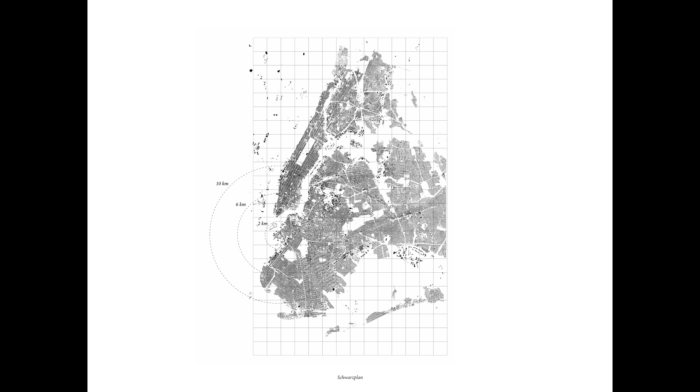Red Hook is one of the earliest neighborhoods in New York City, located on a peninsula in the southwest tip of Brooklyn. It has a long history related to the working waterfront as a part of the New York City harbor. In the 1850s, the Atlantic Basin was opened for the first time and Red Hook became one of the busiest and most important ports in the country.

In 1939, Robert Moses, also known as the Master Builder, started the project of Gowanus Expressway as a part of Interstate 278 communication. It created this boundary separating Red Hook from the Carroll Gardens and the rest of Brooklyn. People are sometimes also referring to Gowanus Expressway as the Chinese Wall.

Its separation, caused by the cutting infrastructure of Gowanus Expressway and poor interconnection with the New York public transport system, creates this certain disconnection, which makes Red Hook so special and diverse in comparison with any other part of Brooklyn. Back in November 2017, this was the first couple of words I wrote down about my observations. They served me as a backbone throughout the whole process of my master dissertation.

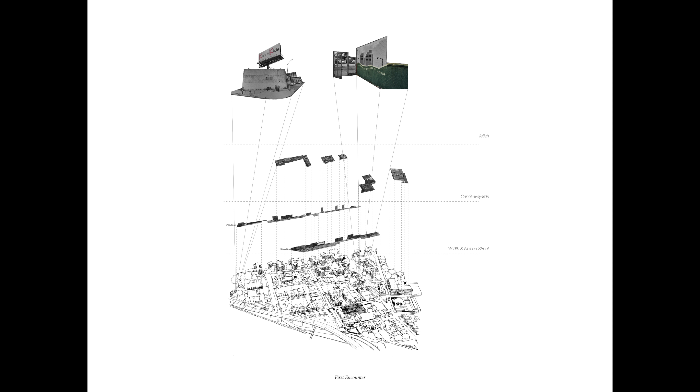Streetscape of Red Hook radiates with potential, mysterious no man's lands filled with old car wrecks and silently asking for a new purpose to ignite the new life and serve the surrounding inhabitants, a potential spark of life. The gradient of life and work in such a raw and genuine form is something I encountered in these streets. People move within the buildings and the streets like it's a natural continuation of building. It's not just a corridor, but another full-fledged room.

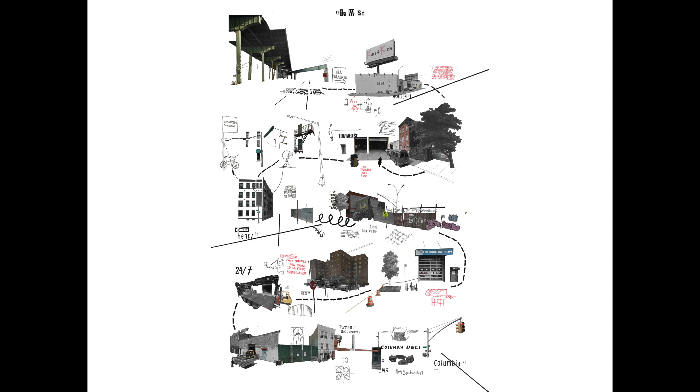Doors are left open because there's really no point in closing them during the day, since someone is constantly moving through, in and out. Streets merge into the buildings and vice versa. By the combination of the technique of collage and sketching, I retraced my journey through Nelson Street and West 9th Street, where my whole research started.

I focused on everything which formulates the architectural language of the streetscape and its characteristics. The process of creation of these maps exposes the very strong relation between the architecture and the added layer of appropriation. Each street has its unique appeal due to this layer added on top of the universal base of generic architecture, easily interchangeable with the immediate vicinity.

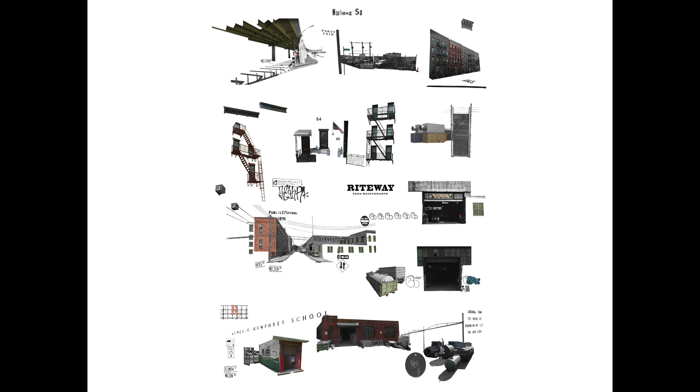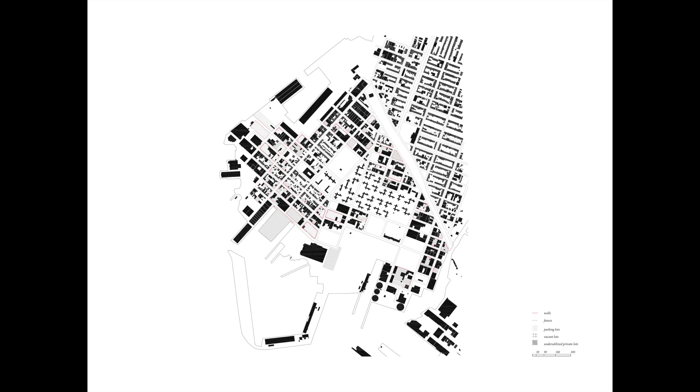To further investigate these relations of different vacant lots and their morphology and other characteristics, I created an adaptation of the Nolli map. It showed that the original urban grid is not completely relevant in the urban context of Red Hook, and if we start questioning the permeability of the empty lots, the whole concept of the grid is slowly evaporating. This puts a question to how we look at the movement within the urban fabric, especially slow mobility, in the current context, and what are the potential transformations and improvements for the future.

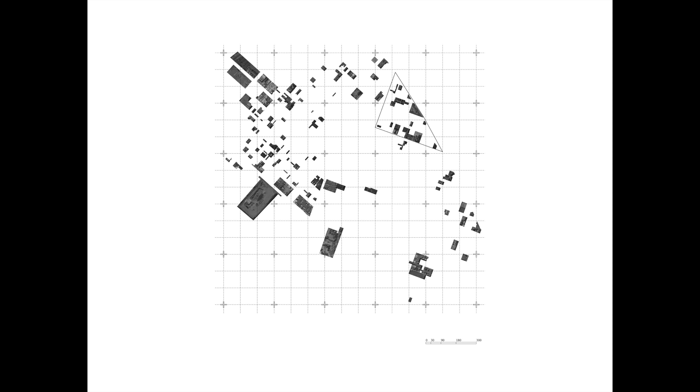From the observations and research, I came to design decisions which were crucial for my next process of creating the architectural intervention, considering the pivotal scale condition of the neighborhood. By allocating all of the underutilized and vacant lots within the urban blocks of Red Hook, their ubiquity within the area came to understanding. The walls determining the blocks of Red Hook give a very porous and ambiguous feel. The matrix of the newly discovered geography offers new models of spatial syntax and slow mobility connections, contradicting the urban grid as a given condition primarily designed at the scale and pace of a moving car.

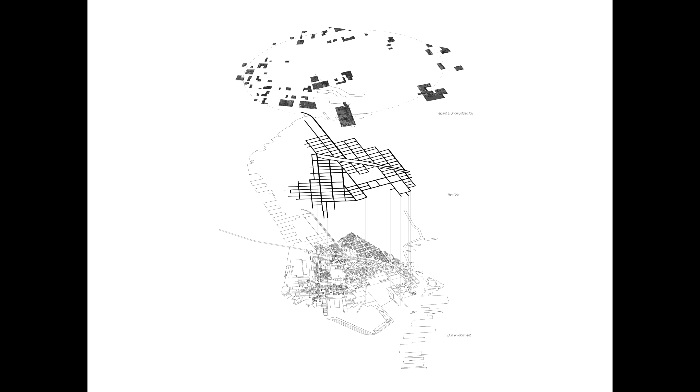The goal of this intervention is to allow a completely new way of movement in the urban environment of Red Hook and reconnect the identities of each urban block to the public realm and streetscape on different levels, focusing on vacant lots and their reconnection with the building units and the streets forming the new pedestrian infrastructure. This intervention is becoming part of the pre-existing conditions and creating bonds between the voluntarily shared spaces. I came to the conclusion that a unifying urban strategy for the whole neighborhood of Red Hook is too generalizing and would suppress its richness and variability.

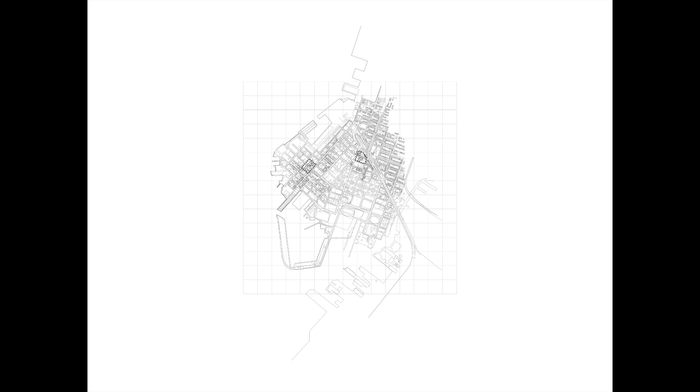Therefore, I'm proposing a series of modest intervention sequences which can be easily set up in the different morphologies of each of the urban blocks, using similar principles, by respecting and enhancing all the potentials, different actors, and site specifics. To allow myself to demonstrate this approach and to be fully capable to depict and describe all of the aspects of my design in this defined environment, I decided to focus my design process on two strategic sequences of the urban blocks.

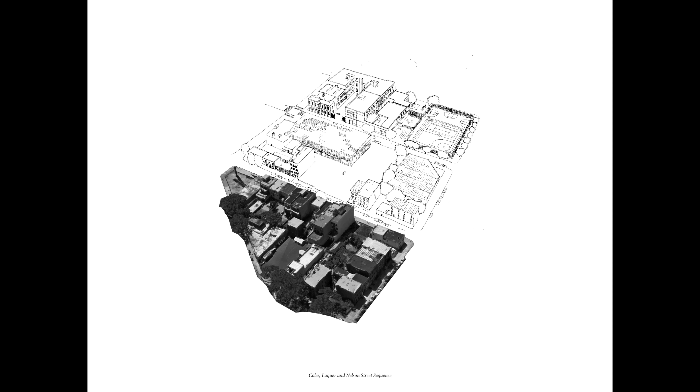The two blocks at the northern edge of Red Hook, represented by the Gowanus Expressway, are forming a rich mixture of different functions and actors. It is one of the few places from where you can actually enter the whole neighborhood and get its first impression. By opening the vacant lots, which have not been in use for more than 20 years, in combination with introducing a new system of vertical and horizontal infrastructures, the whole spatial syntax of this area can be reconfigured.

Two main spinal passages are cutting through the blocks and allowing new ways of access for the inhabitants. In the first one, between Coles and Luquer Street, I proposed the new possible connections, opening up the access to the back gardens of the dwellers on the ground level, in combination with vertical and horizontal connections of the inner facade with the existing fire escape staircases. Also, by an addition of a safety ladder on the column, the old billboard, which is not in use anymore, can turn into an observation deck of the whole neighborhood.

The big part of the second block is occupied by tank maintenance industry, which appropriates a big part of the adjacent lot nowadays. The added cross-shaped footbridge structure reorganizes these vacancies between 4 different actors and gives each one of them the possibility to appropriate and interact with the space depending on their current needs and program.

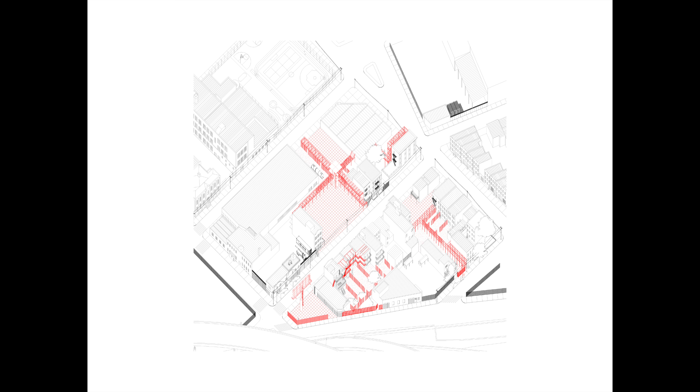The second sequence I decided to demonstrate my intervention on is in these newly rediscovered geographies of the vacant lots, very similar to the previous one, but also very different, as all the urban blocks of this neighborhood have their unique character. The variety would even suffice for a small settlement, so it gives this block a feel of an independent unit. There's a small shop, pharmacy, a church, high school, small workshops, dwellings, and many more.

In this case, I also introduce a main spinal walkway cutting through the block within the vacant lots and reconnecting all the inhabitants, allowing them to climb down onto these lots and use them initially to navigate through and secondarily to appropriate them based on their own needs. It is all based on voluntary engagement and teamwork. In the first block, the intention is to get rid of the redundant fences and substitute some of those with more permeable ones, which I describe more thoroughly in the next 2 chapters.

The big building next to Conover Street serves as a social housing unit nowadays. By addition of the vertical communication and transformation of a couple of windows to doors, the roof is made accessible and a new entrance is introduced, allowing to go straight down to the inner green retreat of the block with flower beds and tall trees. In the second block, the opening of the adjacent cluster of the South Brooklyn Community High School can serve not only its students and teachers, but also the inhabitants of the rest of the block.

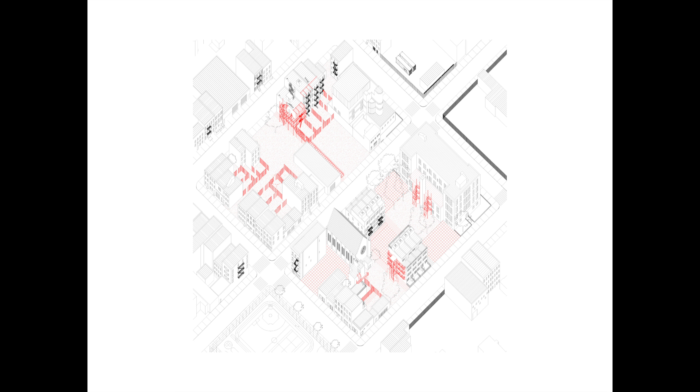The next scope of my intervention is the domestic scale. By zooming into partial elements of my intervention, I am going deeper into detail of all the relationships within the blocks. As a response to that, I propose new territorial bridges, creating a new string of pathways. Zooming in allows me to investigate all the adjacent neighbors and buildings. The next 4 drawings are accompanied by a couple of stories I thought of while making them.

Tonight I finally climbed on top of that black old billboard. It was so calm, with all the stress rushing behind my back, people in their metal coffins going nowhere at 60 miles per hour. I just sat there, maybe for like an hour, just watching over the neighborhood, as an old guardian watching the shore from the lighthouse. When I closed my eyes, I could imagine the sound of passing cars being the waves breaking over the cliffs of Red Hook.

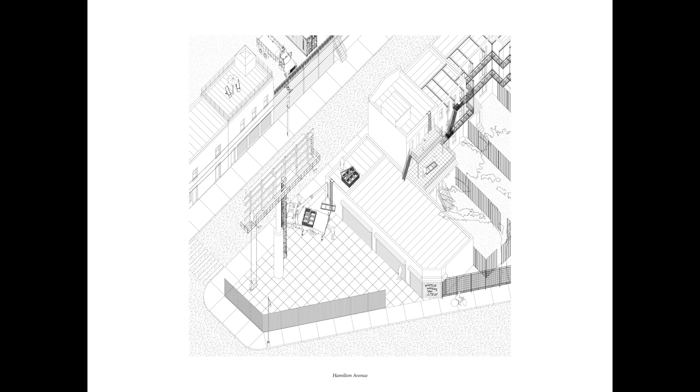It felt like everything just stopped for a moment, at least until I finished my last cigarette, climbed down and went back to my place.

Around a year ago, me and my friend just finished university and we had this idea to rent a place where we could work together, because it is really hard to work from home and stay focused. All the places we've checked, though, were pretty expensive and also quite far from Red Hook. Once we were having lunch at our favorite Defonte's sandwich shop, and we just started joking about how cool it would be to do it in this building that, apart from the ground floor of course, has been deserted for many years. Next thing I know, we were talking with the owner, who overheard us and got really excited about the whole idea.

6 months have passed since then, and they just finished the electricity at their new retreat. It couldn't have been done without the help of Nicolas Defonte, all the people who joined our fundraising and helped us to turn our dream into reality. I have a really good feeling about this. We meet up every day at work, new people come and go, and it's just around the corner from my place, and we have the best sandwich shop around right below us.

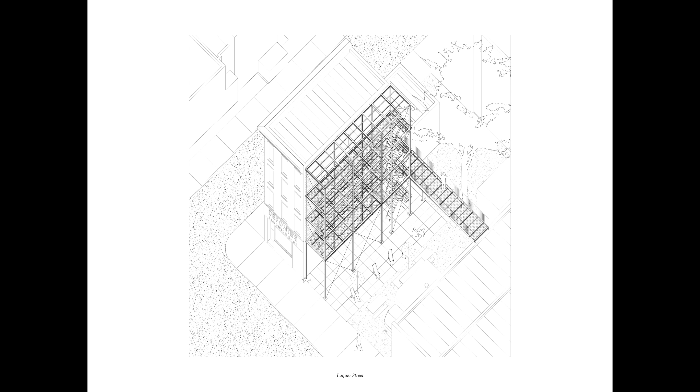Today, after our jiu-jitsu class, Grandmaster Robert had a cool surprise for us. After we were done with our session, he told us to go through the back of our gym to the garden. They had this brand new fence made out of a milky plastic, so you could kind of see through, and we saw some silhouettes behind in faint conversations. We slid the door open, and there was a big barbecue already going on. All of our parents, and also the people who lived around the neighborhood, joined. There were so many kinds of different food, and I couldn't even try all of them.

Master Robert told us that it's a special day because 5 years ago on this day they opened this branch in Red Hook, and also that Pat, who owns the place, talked to the people from church and they agreed that we can use the backyard to do some outdoor sessions and gatherings. Apparently they're also planning a summer school. I can't wait. I was looking at this lot behind the fence many times. It was always right next to our gym, but I've never been there until today.

I've never liked to do things by the book, but I'm glad they convinced me to do it the official way this time. Otherwise they could have given us a huge fine. So anyway, we just got the permit a week ago, and today we're doing our first public screening of the Red Hook Grid 2022 movie. I'm just on my way home with the Beamer to set it up on the structure that we built with the help of our neighbors and some local companies around 2 years ago.

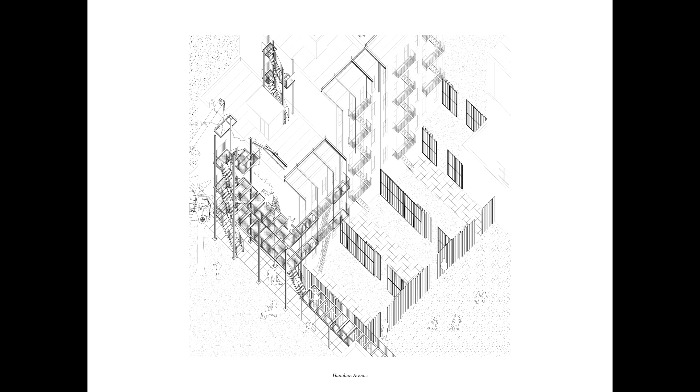The key part of my project lies in this interaction of people on the domestic level of my interventions. People that live in the houses supporting or standing in immediate adjacency of my proposal. Therefore, I'm offering different possibilities of filtering the porosity of the shared courtyards, private back gardens, and newly accessible empty lots.

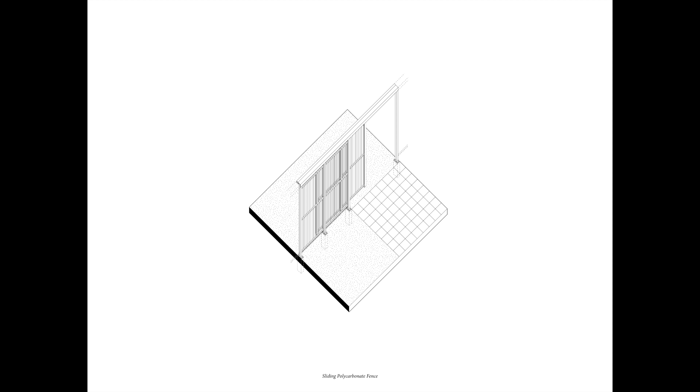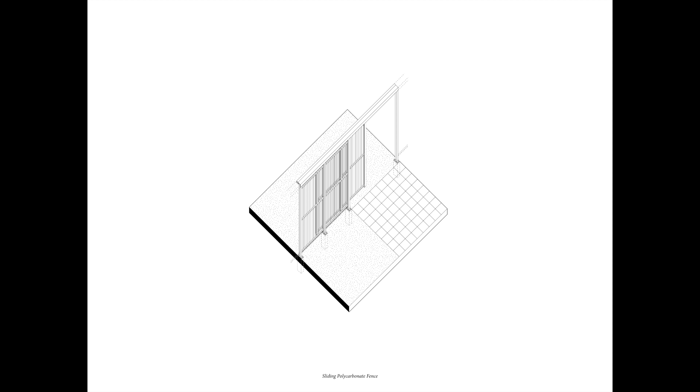Sliding polycarbonate fence. This simple system allows its users to control the accessibility of their gardens just by a simple push. Even if they close the doors, there still remains the notion of what is on the other side, because of the semi-transparent texture of the corrugated polycarbonate panels. They create this tension with the curtain-like effect between both sides. You can see silhouettes passing behind, yet it leaves you with a sense of privacy on one side or another.

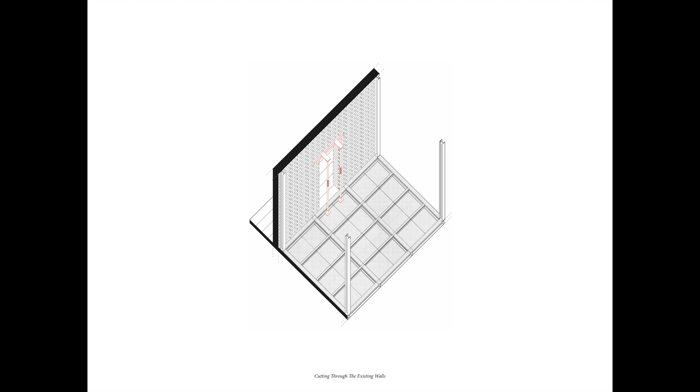The third dimension of vacant lots is represented by the blind walls of the neighboring houses. The intervention is allowing these blind walls to become a lively extension of the existing environment. By simply creating completely new doors or turning the existing window into a door, the spatial qualities of the house are altered without actually changing the inside of the building.

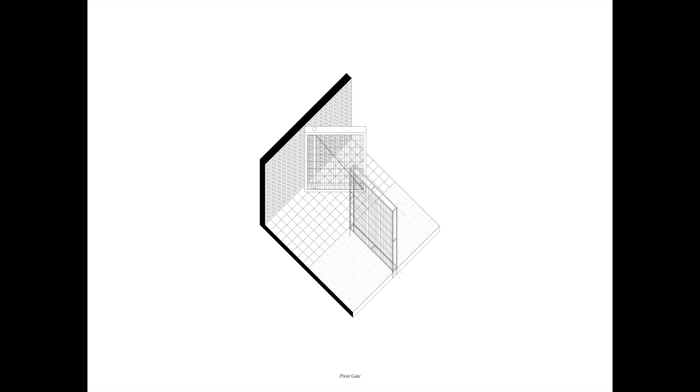This gate is designed not to stand out of the line. It means it doesn't really differ from the non-movable fence segments, so it merges into one continuous line when closed. When it is open though, it peeks into the space of sidewalk just a little bit. Not enough to break a nose, but enough to get your attention and raise your eyes from your phone to let you discover the space behind the fence. It either lures you to step in and take a turn, or it merges with the surroundings, being left unnoticed when you pass by.

As said before, in some parts, the newly proposed spinal infrastructure runs next to the existing buildings and creates different relationships between each other. Hereby I describe 3 different possibilities of the coexistence of the added and the existing structure.

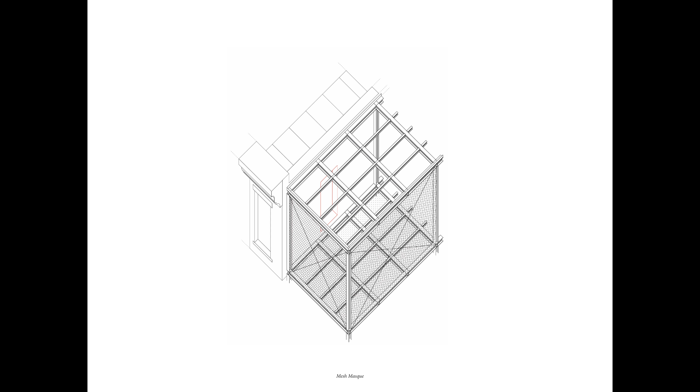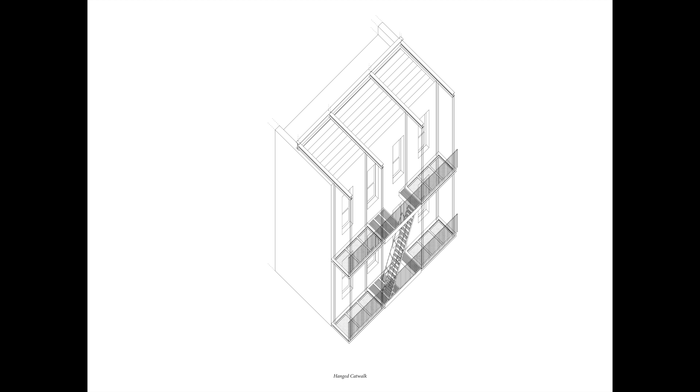In this case, the structure is supported by its own vertical support and therefore doesn't need to be supported by the neighboring building. This case is a solution of how to reconnect the facades of the adjacent buildings with its fire escape staircases to the spinal axis, without actually dropping down to the garden of the house with a vertical support. The I-beam is attached to the existing load-bearing walls and it's creating a counterweight to the load that is hanged from it. This way the intervention is executable without the necessity of the vertical support, which would decrease the qualities of the space below.

One similar situation as the previous one appears, but there is no possibility to apply the technique of hanging the platform from the load-bearing walls. It can also be cantilevered from the existing wall. Addition of the steel profiles attached to the existing wall into this design solution is supporting the structure. This step also eliminates the necessity of vertical support and the intervention stays more subtle.

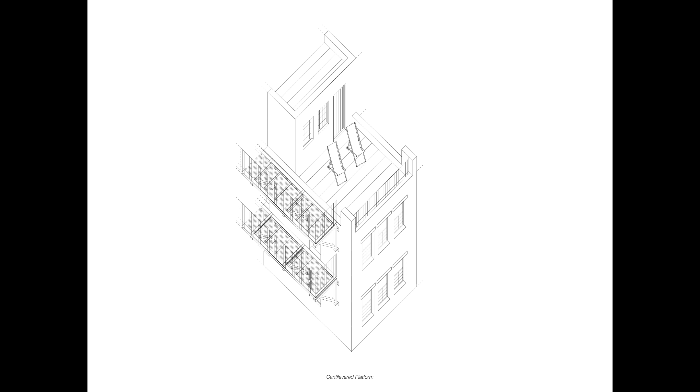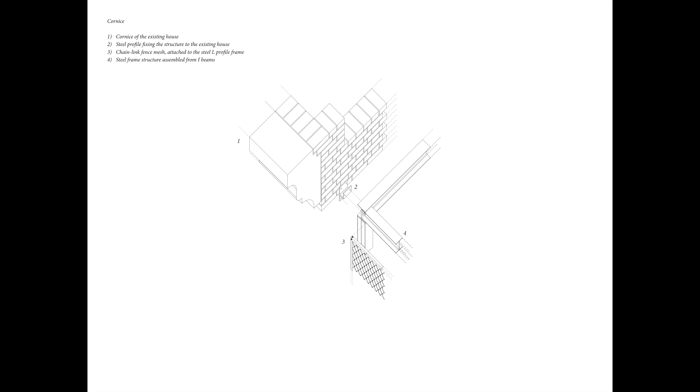The last scale of my intervention, where I zoom in even more, is the part dealing with the architecture detail. Here I want to show how I imagine my design to be actually executed. The materiality and also the process itself is based on the whole idea of this intervention. It aims to be a call for action guerrilla intervention. It is something meant to be erected by the people themselves to improve the pre-existing situation, rather than something which is invading it and trying to fit in. This whole project is about connecting the dots with tender and very local approach.

Galvanized steel structures where you can engrave your name with the keys of your house, or leave it tagged with a Molotow marker. Metal grate flooring on which you can scrub the dirt of your shoes before you climb into your room. Wires which you can use to let the new tomato plant climb on, because why not test your gardening skills? I am showing you how I would open the wall of my room to connect it to the catwalk outside of it. Just carefully take out brick by brick and leave the hole as it is to remind me of this change I made myself.

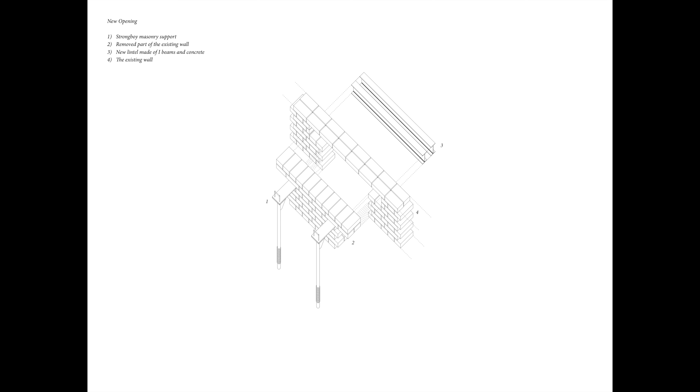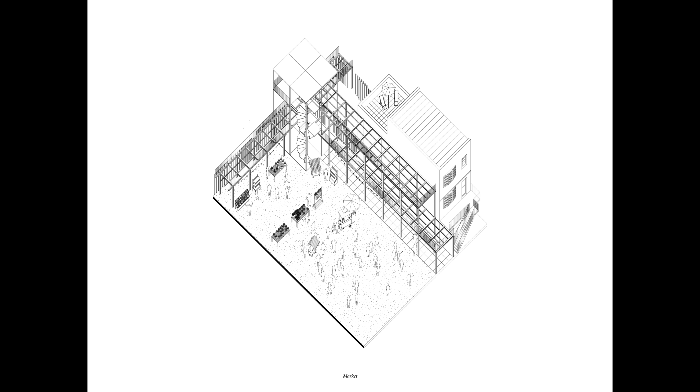The line where the design stops for me and starts for the people is right at the moment they start using the structure. This tender and in a way dry intervention offers endless possibilities of customization and use, which I might not even imagine myself. I'm offering the basic framework with the initial intention of reconnection, almost like when you design a bridge and you can't really control the behavior and occasional misbehavior happening underneath it.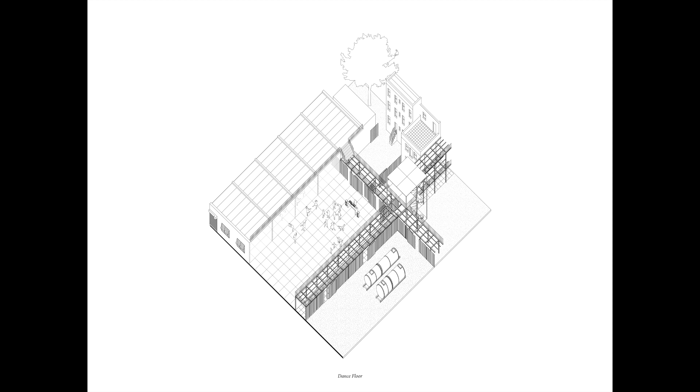I illustrate some of the possible scenarios that my design can serve and have also unwrapped other possibilities of the space it connects. The variety of actions it can host only depends on the imagination of its users. There are no limits. From the more formal and public ones, as in the local market, public screening or announcement, or cultural event, to more subtle and individual ones, as a cigarette break, a date, or reading a book. It can relate to people who live next to it, people from Red Hook who just pass by now and then, and people who are in Red Hook for the first time exploring it on their own, making their own way through the neighborhood like I was back in November 2017.